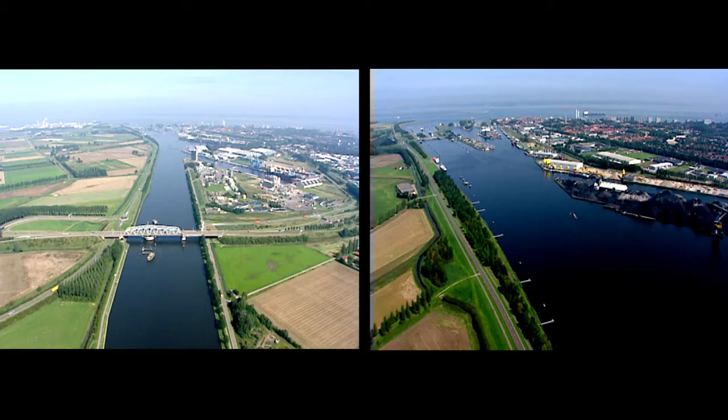In the far southwest of the Netherlands, in Zeelandic Flanders, is Terneuzen, a city with an important port and industrial area. This area is located on a main international sea transportation route, the channel from Ghent to Terneuzen. A good infrastructure is of crucial importance, not only for the current industry, but also for attracting new business. Traffic via water, road and railway all need to flow quickly, and that conflicts at times.

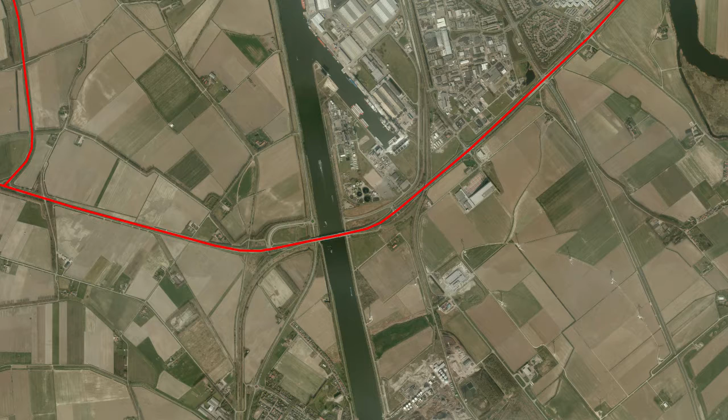The N62 is the most important connection for road traffic in Zeelandic Flanders. Not only does this highway connect East and West Zeelandic Flanders, but it is also the connection between the Western Scheldt Tunnel and the Tractaatweg towards Belgium. The swing bridge near Sluiskil over the channel from Ghent to Terneuzen is part of this road connection. Trains also make use of this bridge.

This bridge presents a problem though, as it is open an average of 23 times per day due to the intensive sea traffic. That's more than 5 hours. This causes long wait times.

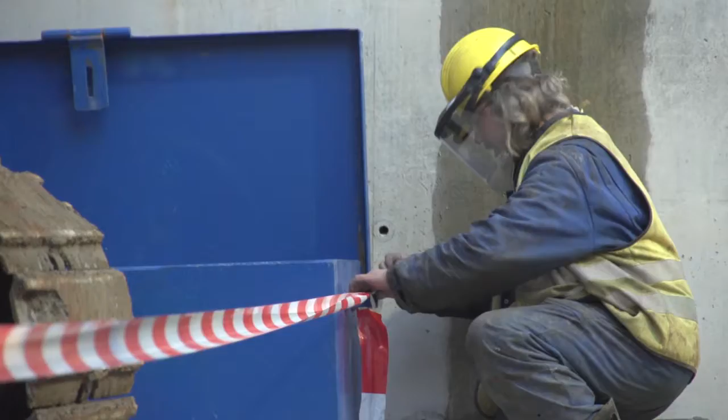There's one more goal, and that is that during construction, this project will become the safest civil construction project in the Netherlands.

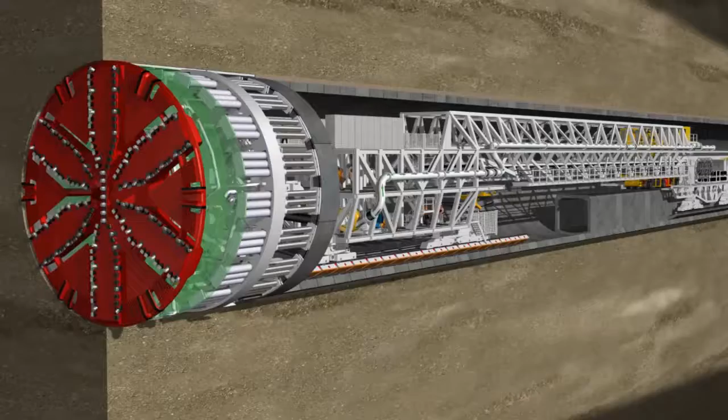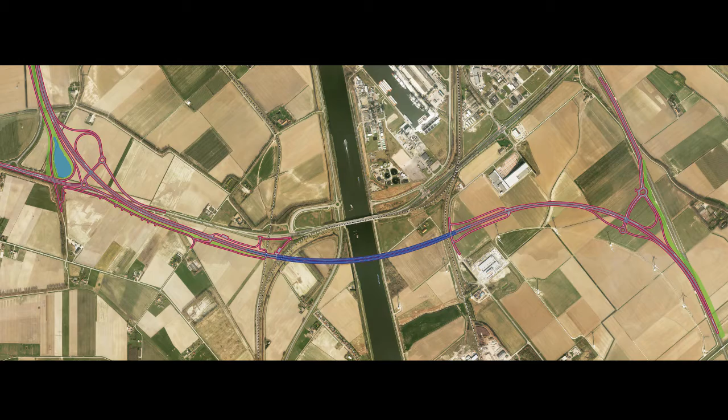The tunnel will connect to new roads and viaducts, as well as the existing road network. Thought has also been given to the integration of the railway, and as such, a new railway viaduct will be part of one of the tunnel exits.

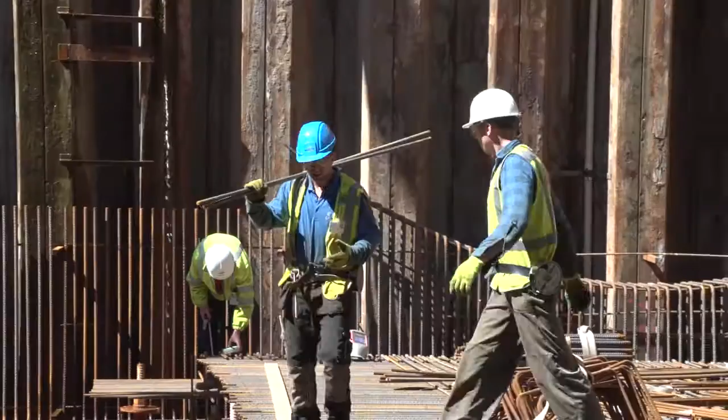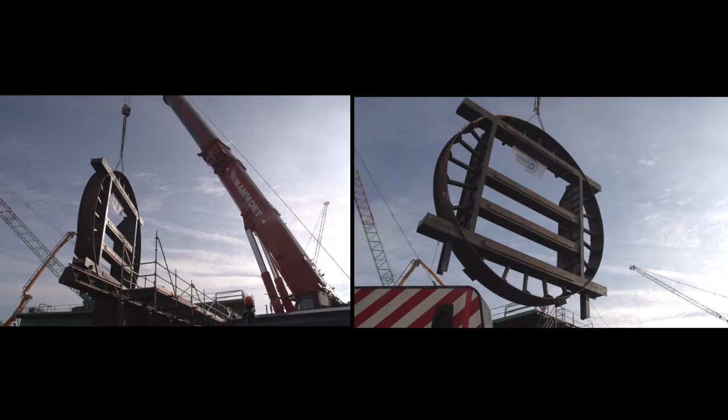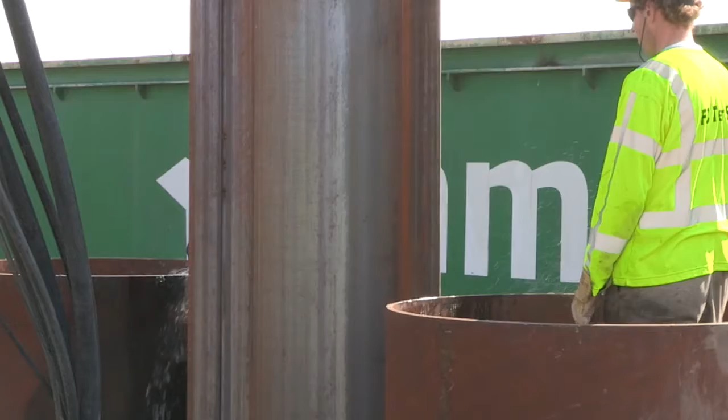After all of this planning and designing, building begins. To prepare for the building process, 2 20-meter deep pits need to be built on both sides of the channel. Not only are these pits the starting and receiving shafts for the tunnel drill machine, but they're also the on-ramps for the new roads. And that means digging, building dam walls, bringing in grout anchors for securing the dam walls, pouring concrete and pumping out groundwater.

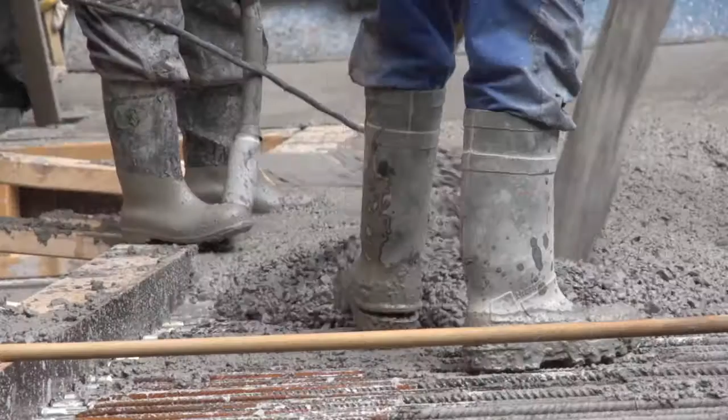The concrete bottom needs to be very strong too. We've had to deal with the resistance of the groundwater pressure. The bottom will be constructed both wet and dry.

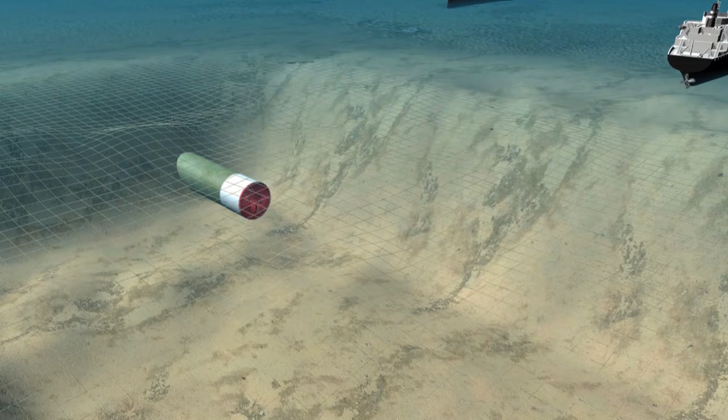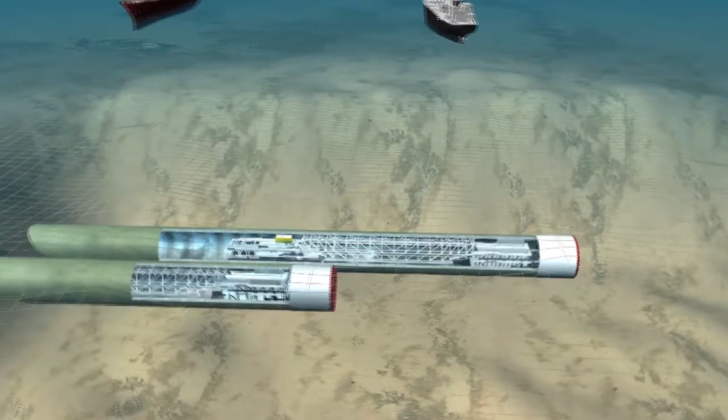Then the drilling process begins. There will in fact be 2 tunnels, one per traffic direction, with 2 lanes each. At its deepest point, the tunnel is about 35 meters below the surface. It continues to be a process with risks, and no matter how many safety precautions are taken, accidents lurk in the shadows, so external help is greatly welcome.

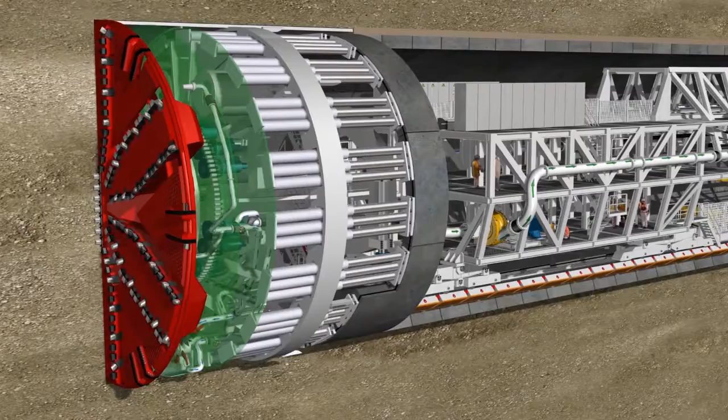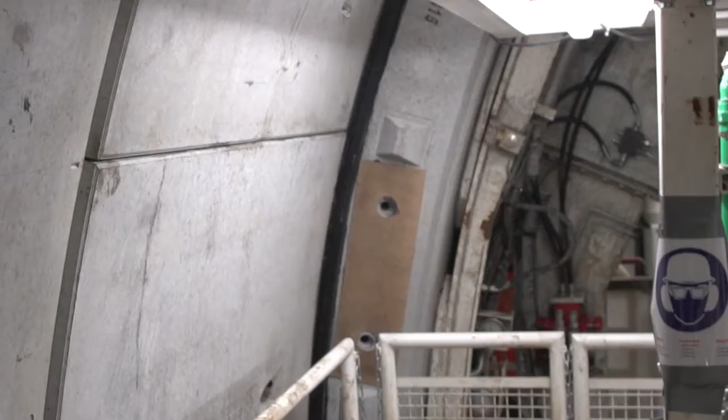The drill being used is a tunnel drill machine. It is actually an entire factory. On the front is the cutter head with the diameter of almost 11.5 meters. The entire drill is about 80 meters long. Hydraulic cylinders ensure that the drill is able to move forward. The cylinders push off the latest installment of cement and push the drill forward.

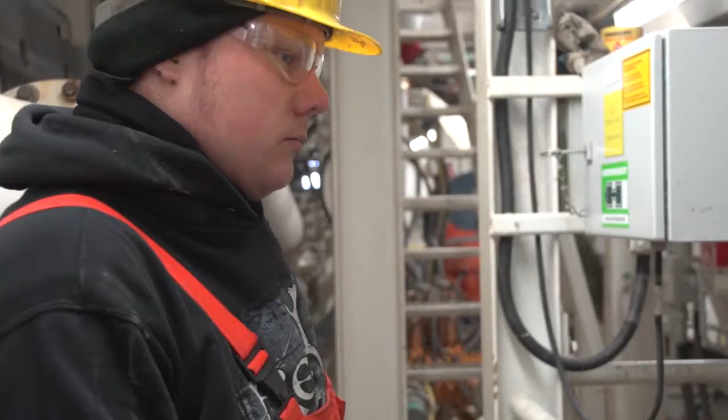The drilling works in 2 phases. The first phase is mounting the tunnel ring. Every ring consists of 8 segments. An erector places the segments with down to the millimeter precision. The last segment, the keystone, has a tapered shape and is inserted from the front of the tunnel ring.

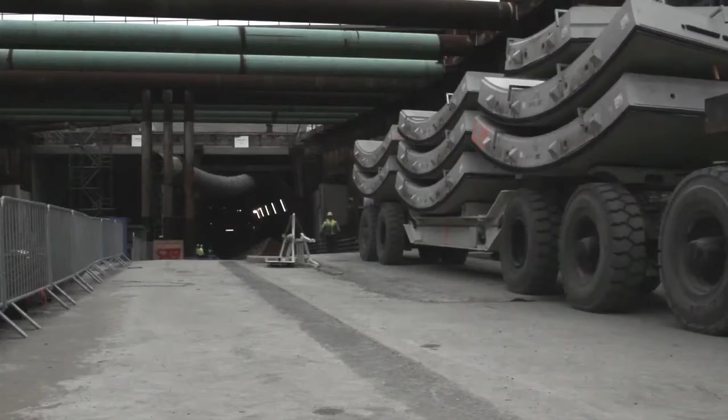Many of the drilling team are from Germany, but there are also some Dutch experts. What is it like working with a group of Germans? Voll und super.

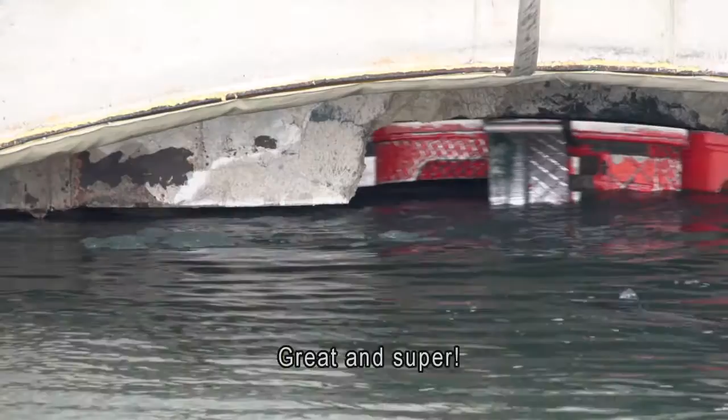And after 3 months, it's come this far. The other side has been reached and the first tube has been drilled. It's pretty exciting. There it is.

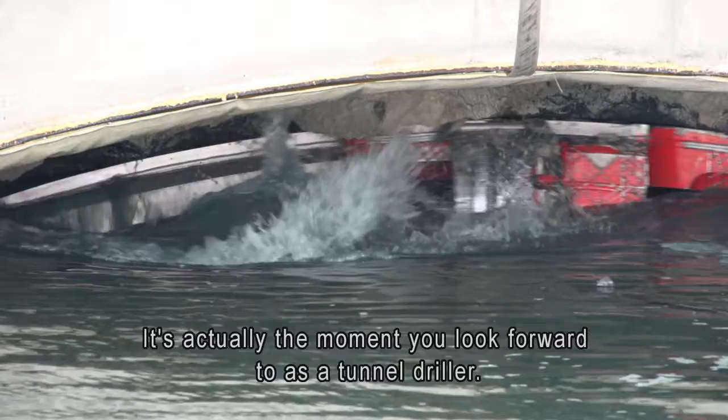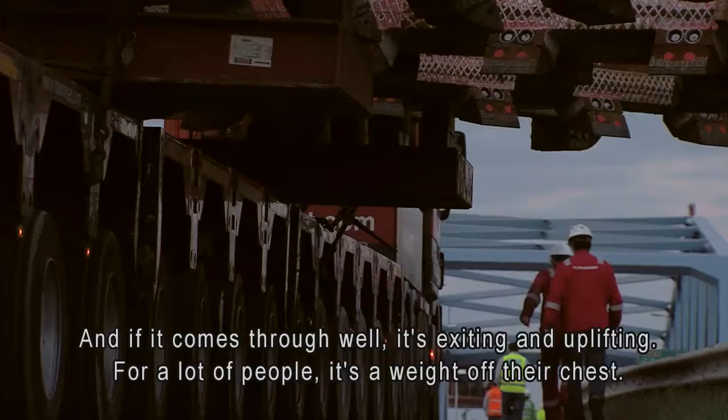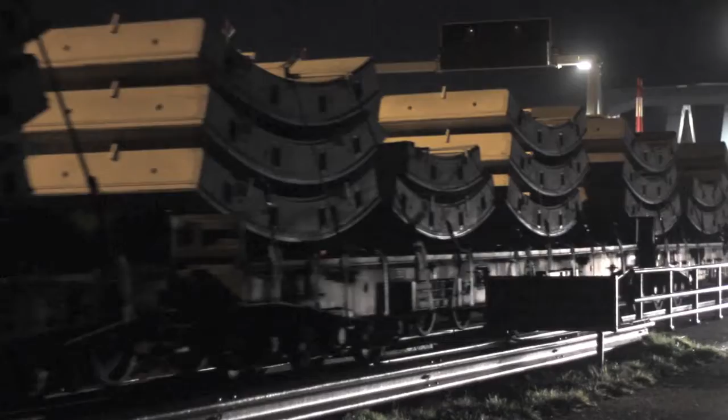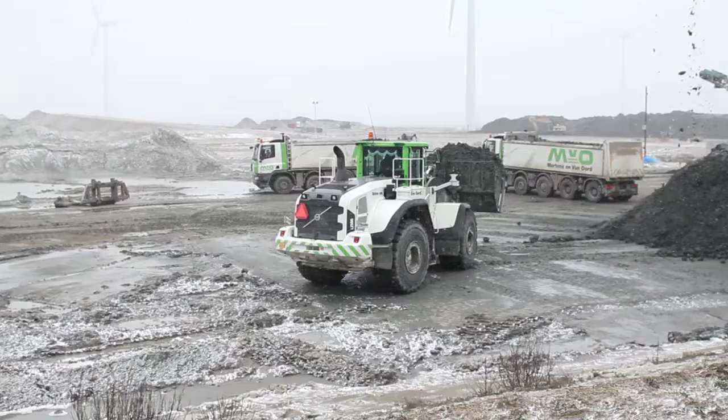The drill is now deconstructed and brought back to the starting point in parts. The drill will be rebuilt to begin its second task, the south tube. The 2 tunnel tubes, each 1,145 meters, are built from a total of 9,200 tunnel pieces. That equals about 230,000 cubic meters of sand and clay that are dug out and cleared.

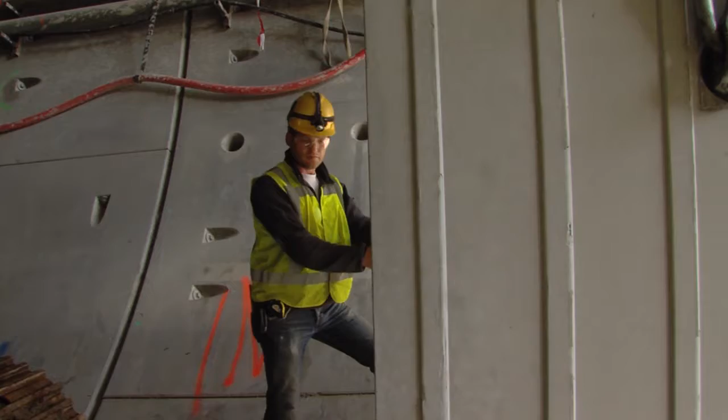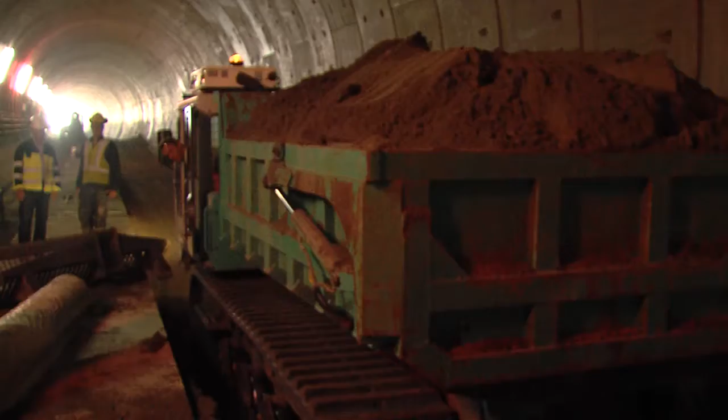Man-sized cable channels are currently being placed in the North Tube. The necessary wires and piping will be added to these channels, and the space under the future road will be filled with sand. All kinds of safety systems will be added in and around the tunnel, including cameras, so the Western Scheldt tunnel operators can continuously monitor all traffic.

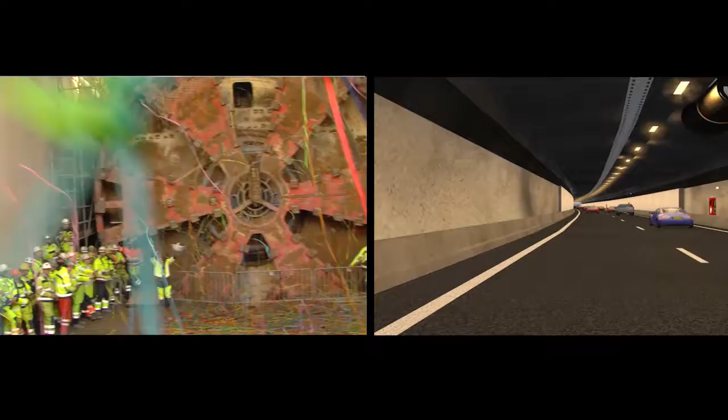Beginning in mid-2015, around 20,000 vehicles will make use of the tunnel every day. That equals a savings of 10 million euros worth of wait time costs, which means an extra 10 million euros worth of possibilities for economic expansion.